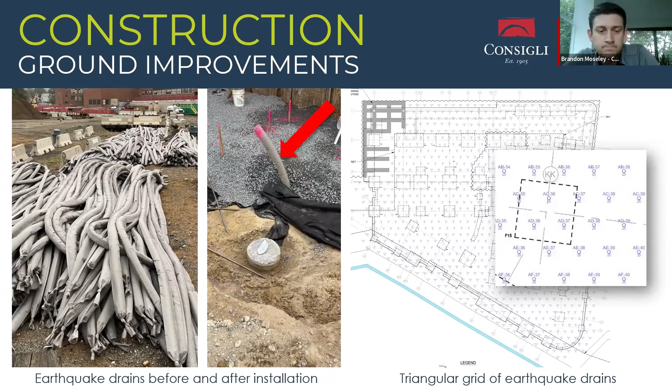In the middle photo, you can see what those rigid inclusions look like on top as we expose them, get to subgrade, and before we build the load transfer platform of stone on top. That's just the top - they vary in depth from 25, 30 plus feet down, depending on where it is.

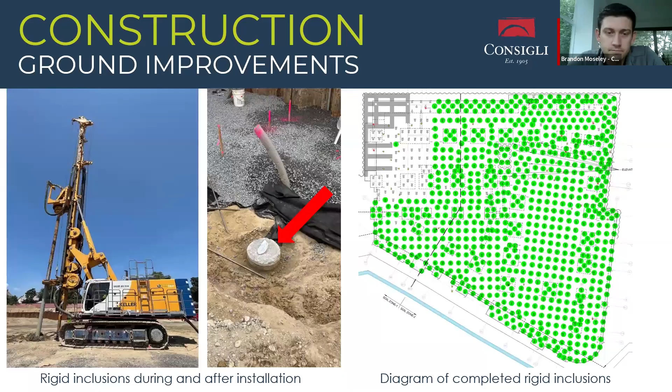The sequence of this install is very critical. Keller, Consigli, Left Field, RDA, Terracon, and SGH are talking every week about the sequence, how they're going to go in, and how to best support the sheets and the existing school. That's an ongoing weekly conversation, but things are going very well - we've had no major issues.

We're tracking the quality of them as we go. We haven't seen movement of the sheets that would cause anyone concern, which is fantastic - it means the solution we chose is working, along with the installation method.

These go a little slower. We're assuming this is about 8 weeks worth of work. We've done 50 of them through the end of day today, out of a total of 160. So we still have some time doing this scope of work while we get to the foundations on the other side of the site.

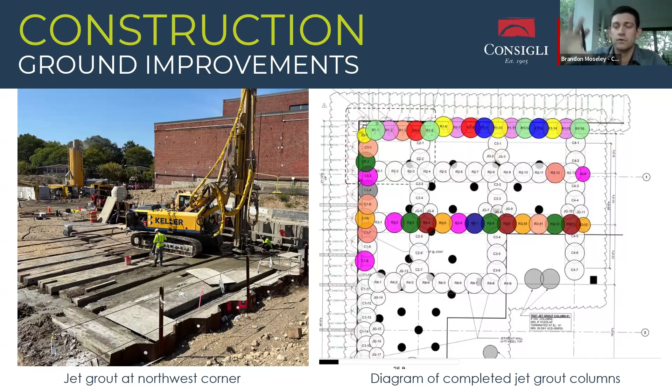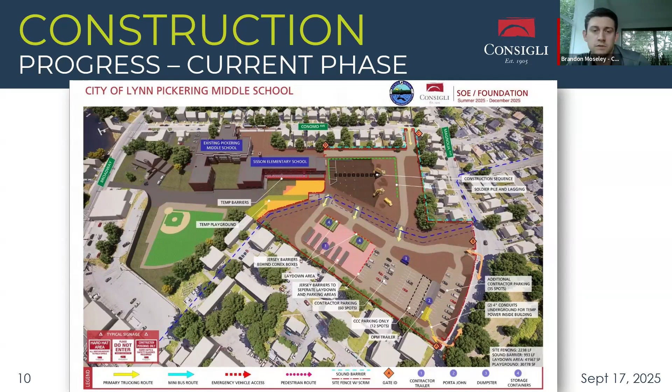There are some temporary handrails in fabrication now that will go in during school downtime, maybe a holiday, so we can get in there and put them in. But everything is safe for working, and we were able to turn over that temporary playground again for use, for both gym class and recess each day.

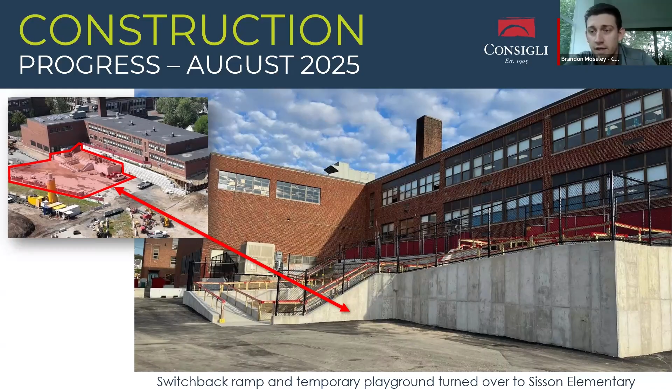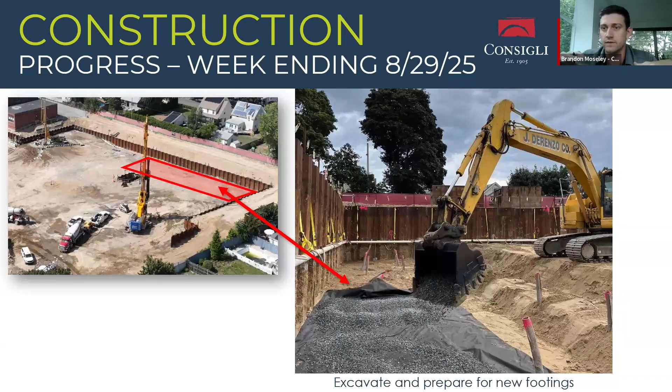This is another good shot of our prep for footings. You'll see that staggered process - we have the cut of all the subgrade, we've laid down some Mirafi to prevent anything from getting into that stone layer from below. You can see some more earthquake drains popping up, and we're really getting that stone in to get a 1 foot layer, which acts for both the earthquake drain system and the load transfer platform to distribute the loads underneath the footings down to those rigid inclusions.

This is a drone shot from a week and a half ago, showing our progress, shot from the northeast corner of the site. You can really see we started with an offset off of the jet grout scope along the north sheets, and we've worked our way around - we're going to continue around the sheets and then towards the south side of the building to get those foundations.

We've placed a good amount of footing, which is in the next picture, but we really are chasing that area. In this photo you can see rebar in on the right side of the page, right where that cursor is. Our concrete sub is chasing behind the site work sub as they get as much prepped as they possibly can, to keep going with our footing.

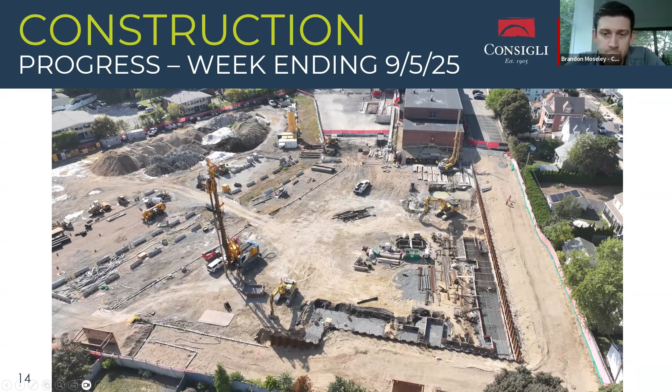Another good shot from the south side of the site - you can see that switchback ramp area on the back side of Sisson turned over. A lot of that equipment just south of that cursor has to go with the jet grout scope of work. There are a lot of steps associated with that work, which is what's keeping us out of that little northeast corner until we can get that done.

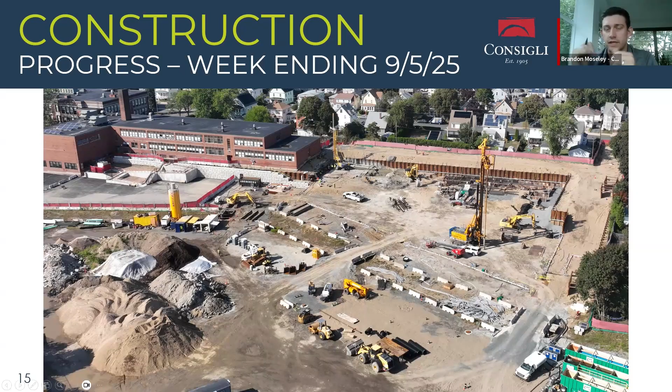A great milestone for us that everyone was hoping to reach was getting those first foundation footings placed. We got the first one placed where we showed in that drone shot earlier, up against the north sheets, getting to the northeast corner of the building footprint. We're wrapping down towards the east side now.

We're going to chase that in a circle, continue with footings, and then in about two weeks we'll be mobilizing with what are called gang forms, because this is a large, tall retaining wall, to start setting form work and get ready to place a foundation wall.

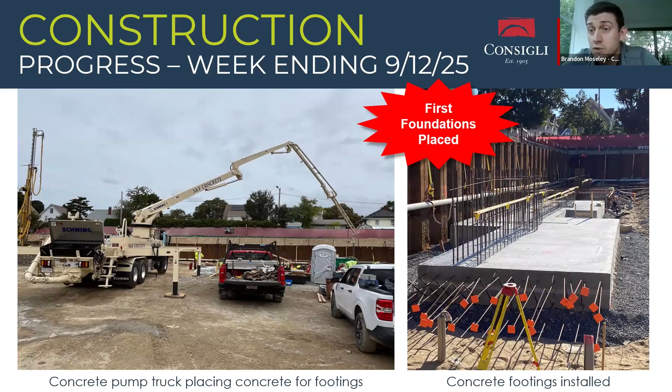So this is, do you want me to take this one, Craig? Yeah, sure. Yes, please. Okay.

We did great production-wise with rigid inclusions and earthquake drains. The jet grout is one thing we just can't gain time on, which we were a little worried about. We're working some extended days, but there's only so many columns that can be done at once, so that'll handcuff us a little bit to get out of the ground from a schedule standpoint.

But once we get through this winter, fingers crossed it will be a mild one, we plan to reevaluate the schedule and see if there are opportunities to pull in that end date, if at all. It'll be something we continue to look at because I know it's important to the city.

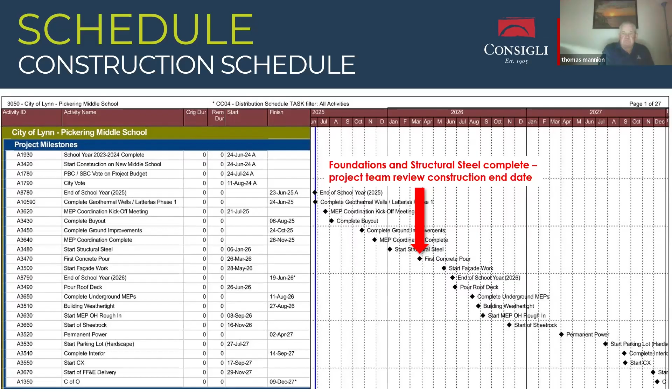Just a comment, you're doing yeoman's work. It's unbelievable, but you drive by and don't see anything. Once the steel goes up, everybody's going to know we're building a building here, which is like a milestone we've gotten to. Here's the steel, we're moving forward, so that's great. That's good news. Absolutely, agree one hundred percent.

Any other questions? Oh, and to underscore what we were just saying, come spring of 2026 is when the team will take another hard look at this main construction duration and see what we can do about it.

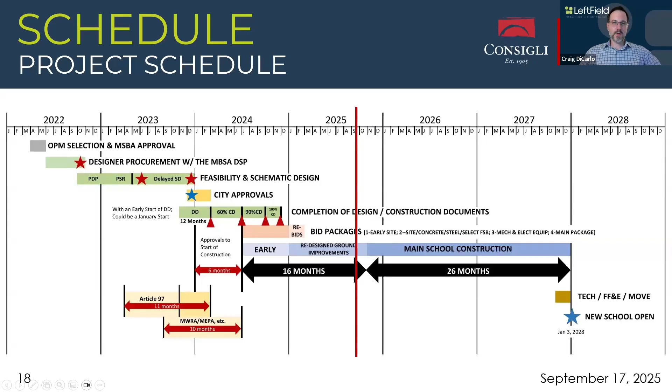Next, we've got our upcoming building committee meetings: October 15th, November 12th, and December 17th.